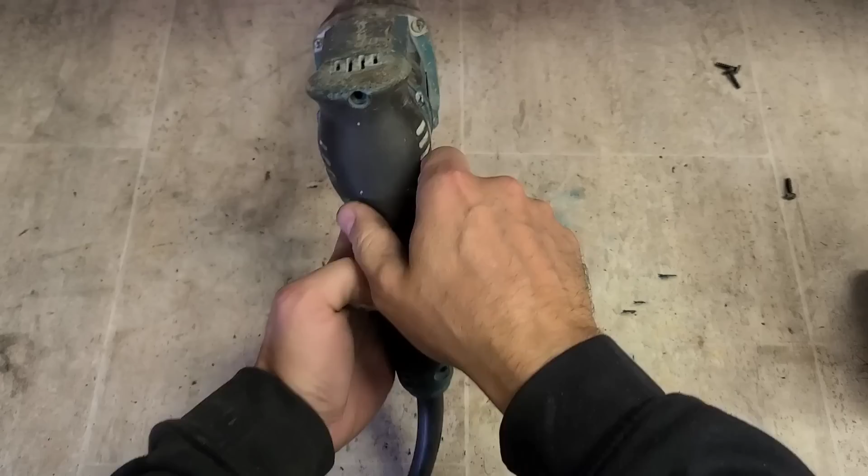Need to quickly get into this and get her fixed. He's not standing waiting on it, but he needs it today. He's gone away now to actually fit some of the gates and railings onto the holes he's already bored, so I have a wee bit of time to get her fixed before he has to bore the other holes.

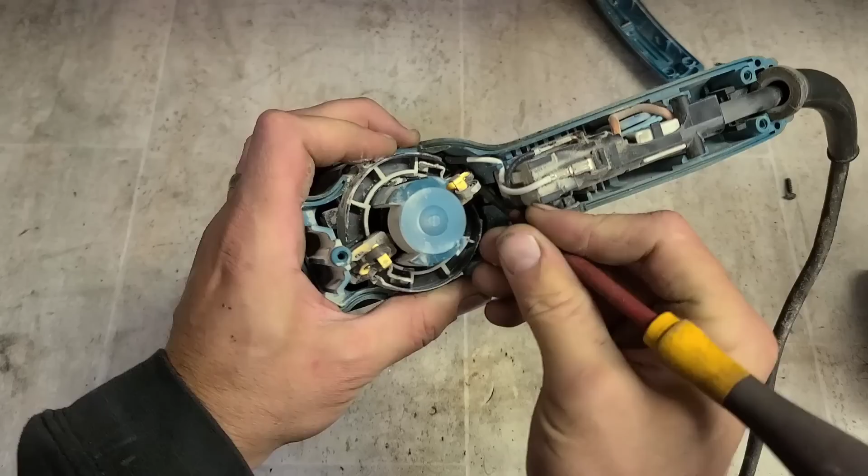Now we don't need to go on to the gearbox section, that should be fine. Doesn't say anything about the hammer performance. This thing just got too hot and popped.

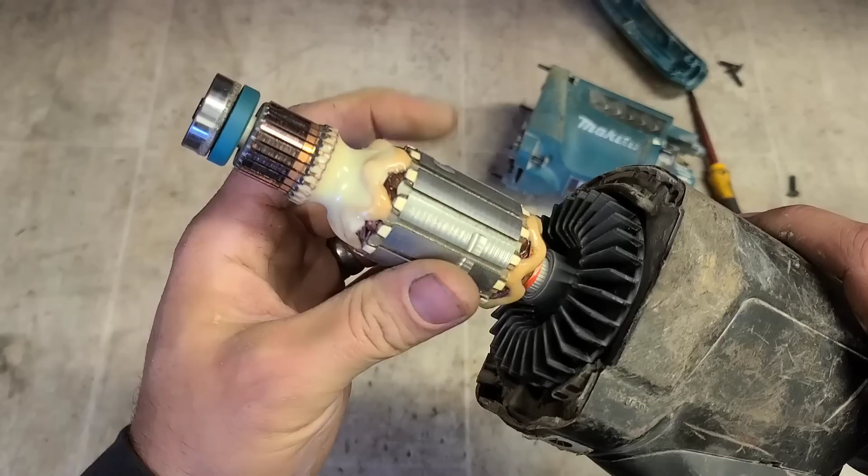It's even hot just from me running it for a few seconds. It's just one of them motors you can't actually tell by looking at it that it's burnt out. Looks good, but it's shorted out somewhere inside.

So one of them windings is actually touching the other, and there's two segments of the armature being energized at the same time. So whenever the right one is energizing, another one is forcing back on it, causing it to try and run both ways at the same time basically. That's why you hear it struggling. New armature needed.

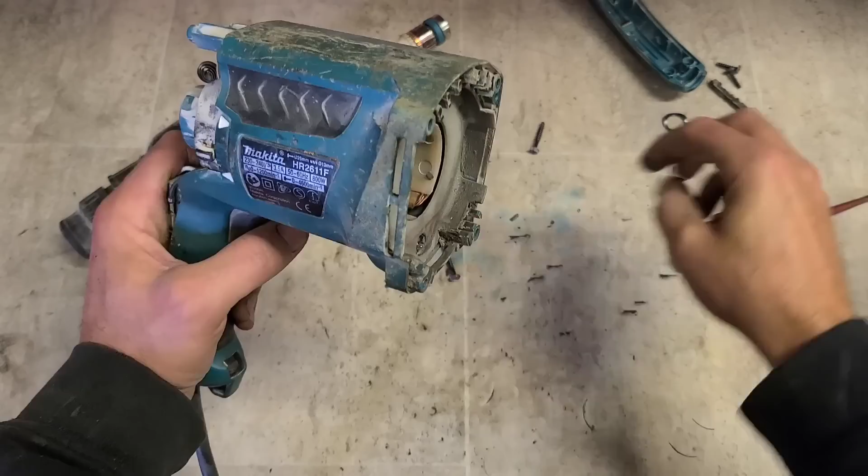Block vents ain't going to help it either. Just give that a quick wipe down as well, because we can't spend too much time on this.

Switch out of the way so we can get to this screw. It's just so we can take the brush holder out. This will need a new set of brushes as well if we're putting on a new armature.

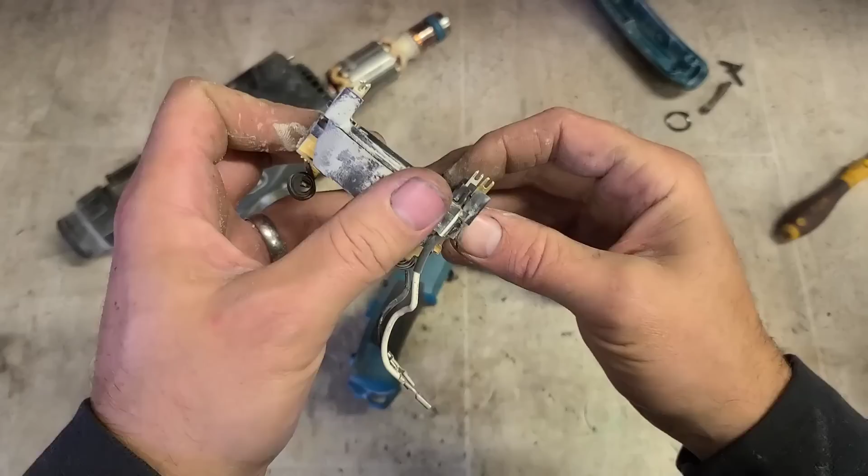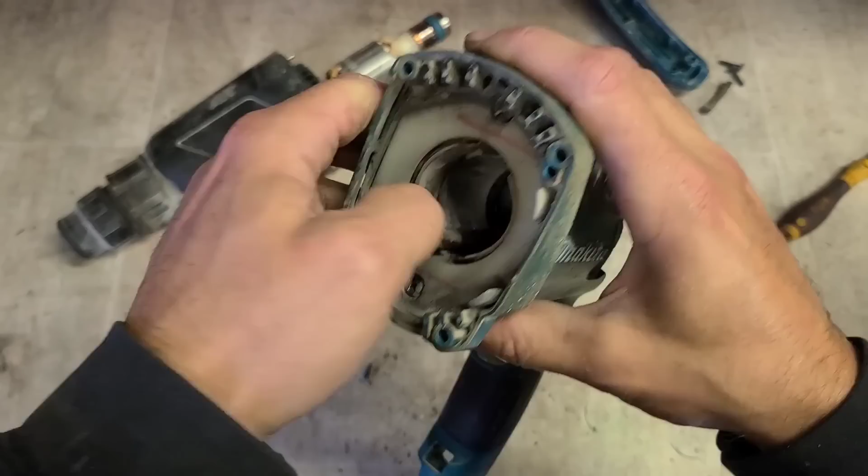Now the contacts aren't burnt either, so that should be okay for the field. And the field itself hasn't melted either. Sometimes when they get too hot, the coils of the field can get too hot and melt the plastic up here, which then shrinks in and jams up the armature, but that came out free enough, so that should be alright. The coils themselves aren't actually blackened or anything, so that should be okay.

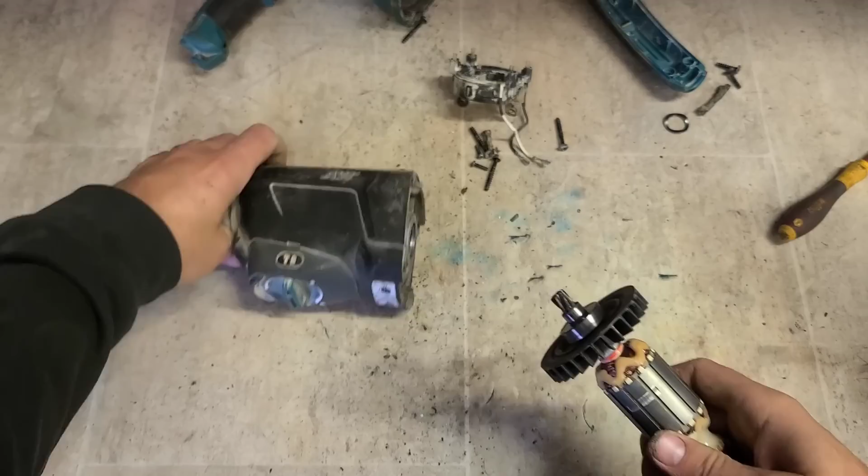Just to be sure, stick it on here just in case. Gone.

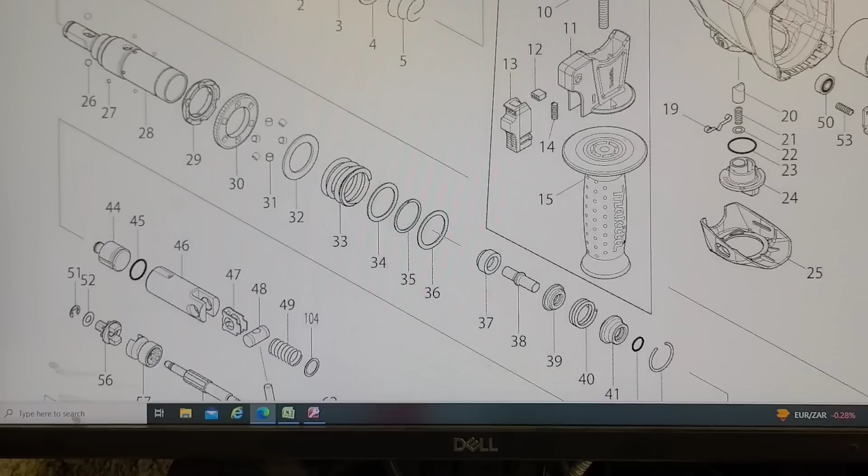Right. Going to need a new one of these and a set of brushes. Straight away, I'm into problems. I haven't got an armature for this thing, not in stock. And this one's a 240 volt. This number here.

My stock is showing me nothing. Never even brought one on before. So I'm not getting a new armature for this today, so I can't fix it with a new one.

Maybe I might have a second hand one. I know there was one here with a smashed gearbox, unless that has the right armature for it as well. If it's a matching one, maybe this will work.

This here one's actually a different model of Makita drill, but same voltage for a start. A lot of Makita stuff, any brand, they don't always go with new parts. Sometimes they can use the same motor and modify the gearbox, which gives it a new number, but sometimes the parts are interchangeable. So we'll check the numbers of this and see if it's compatible with the one we have.

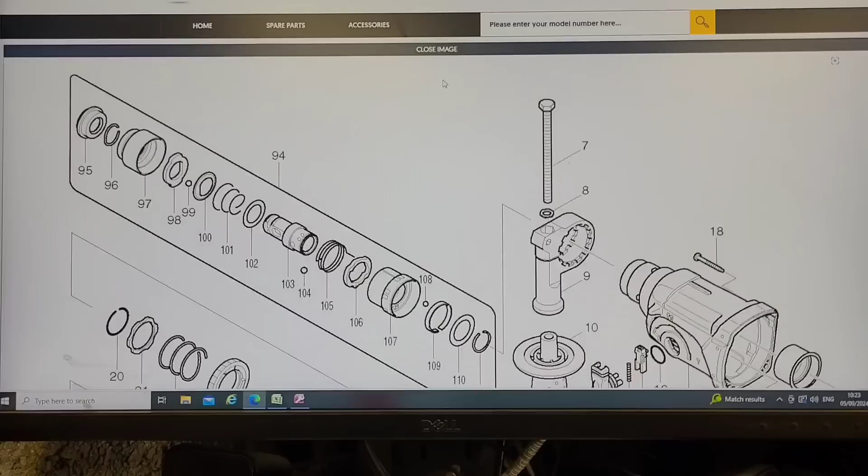Right, so this one is the HR2611T, and our one is actually the HR2611F. So we'll check the number on this, 63, and see if it's compatible. So that's 515289-2. This one's 515359-7. So no, it's not - that one's not the same motor.

Question is, is this the one I'm thinking of? Check the serial number to see why this one was scrapped off. If I search my repair sheets for this particular drill from the past, searching the serial number, it was looked at in January 2022, and it wasn't worth fixing because it has a burnt out motor. The armature in this one's already gone, so that's not the one I'm thinking of.

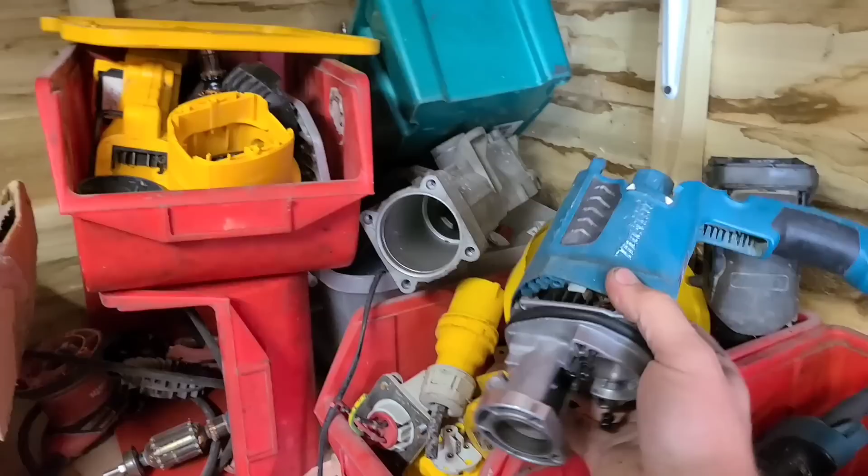Maybe this one - it's 240 volt anyway. Now the body's looking more promising. The actual clamshell's the same, just different numbers, but I'm not 100% sure if this is actually out of that machine now. This is kind of just sitting loose inside of this body.

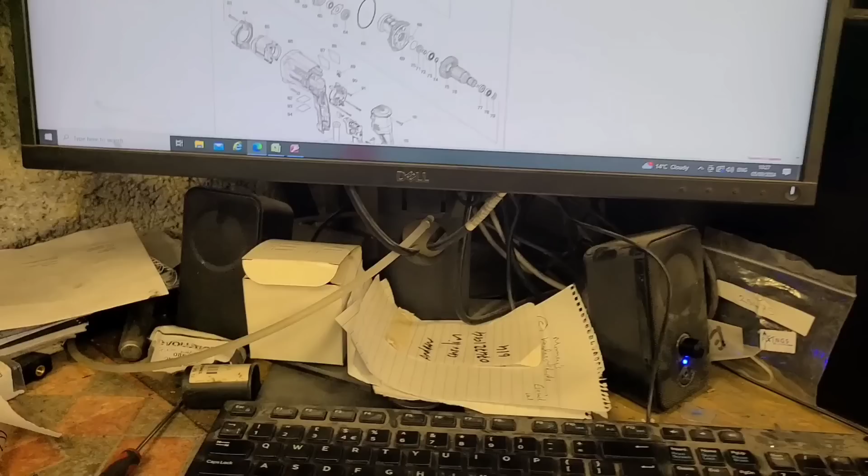Check this first, see if it's compatible. So this one is the HR2610, again 240 volt, part number 76. So 240 volt of that is 5153597. The one we want is 515359-7. So that's it.

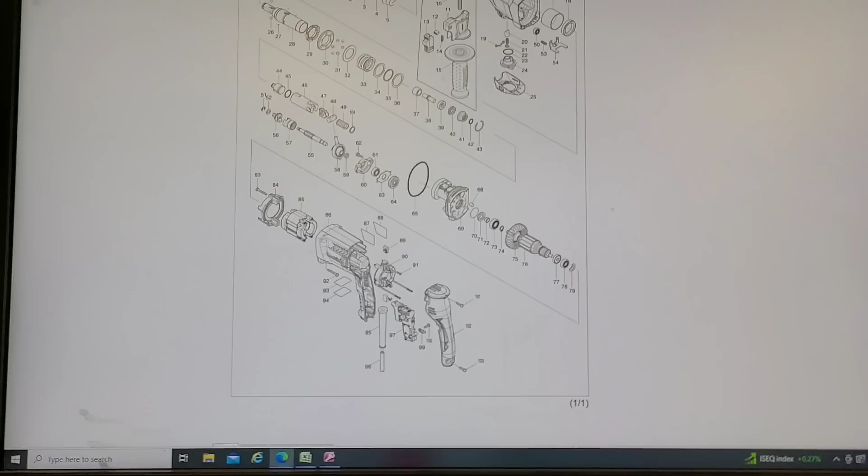This armature from the HR2610 is the same as the HR2611F. I just have to hope now that this is that armature from that drill.

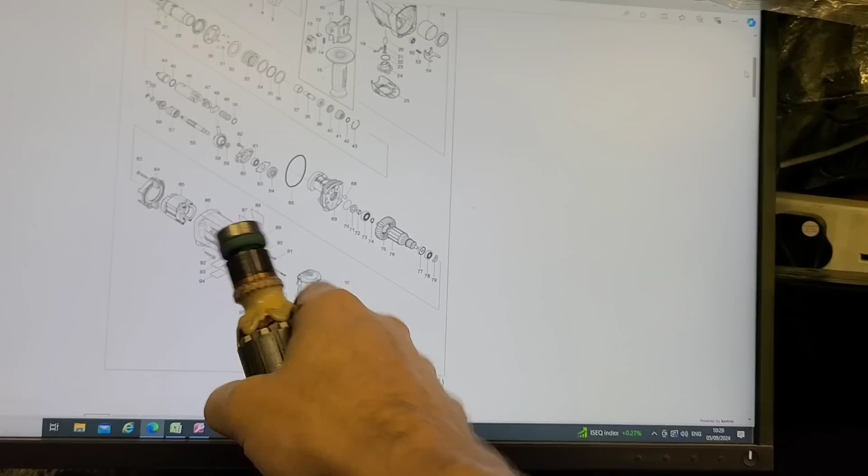Going with the diagram, this does look similar. Now you can't tell the parts just from looking at them - they don't actually have any part numbers written on them, nor does this housing. Sometimes they do, but this one doesn't. So I can't even tell from part numbers if this is definitely the right one, but I should be able to match it to the one we just pulled out anyway.

That looks pretty good. This one looks like it's a wee bit thicker - that's only because there's more lacquer on it, or this here resin. I think we're good to go with that.

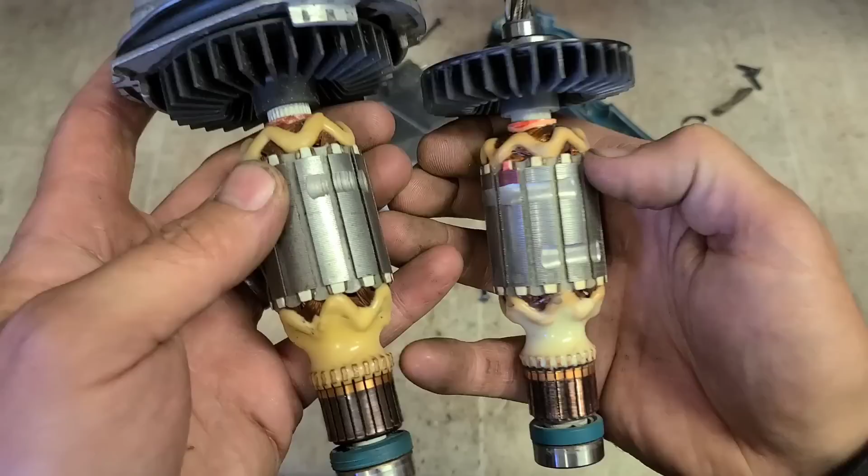One thing you definitely want to make sure is the windings - make sure it definitely is a 240 volt machine. You can tell by the actual thickness of the windings inside. See the way these ones here are a lot smaller and more of them. Same as this one - smaller gauge wire and lots of them. If it was 110 volt, they'd have a thicker wire and less windings.

Like that there, for example. So you can quickly tell if you're using second-hand parts, if you've at least got the right voltage, because you could have the right machine from the right model, but you're not sure the voltage. So a 110 volt will have thicker windings and less of them. The 240 will have a thinner gauge wire.

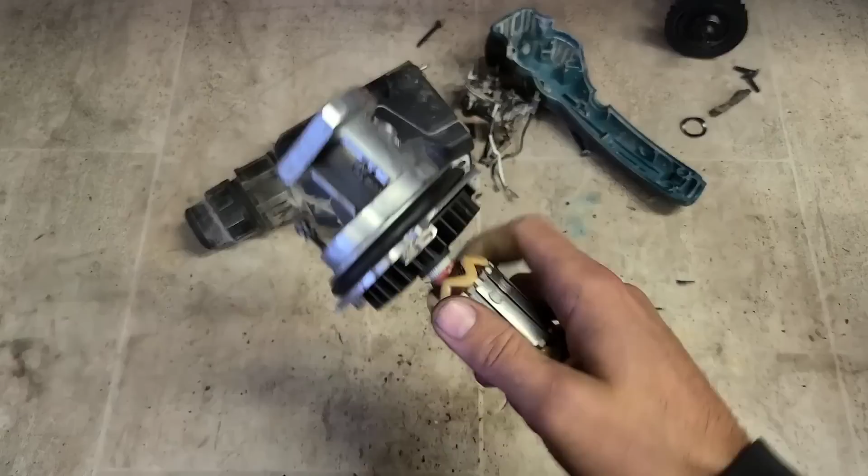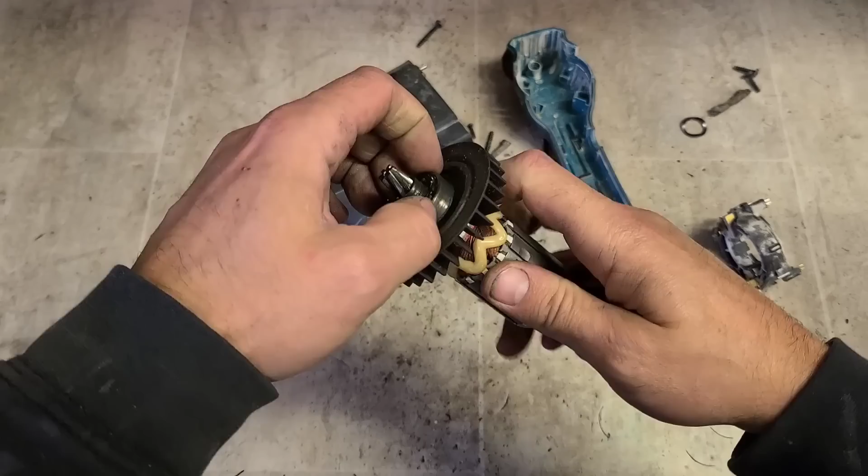So this should work. Might need a bit of a clean just - clean that, we'll clean this down a little bit. And the bearings are okay as well.

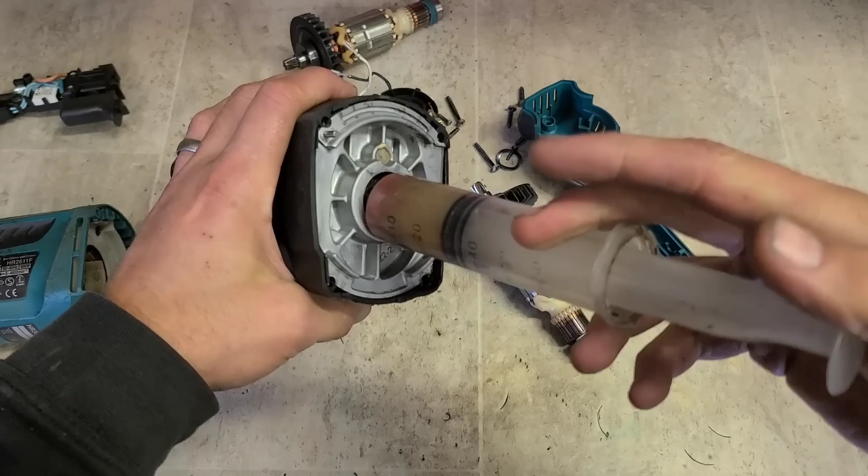Right, that's the insides of her all cleaned up. I think that's us just about ready to go with this Instafix. So stick a little bit of fresh grease on there just in case it's light - not much because we don't know how much is on there, just a top up.

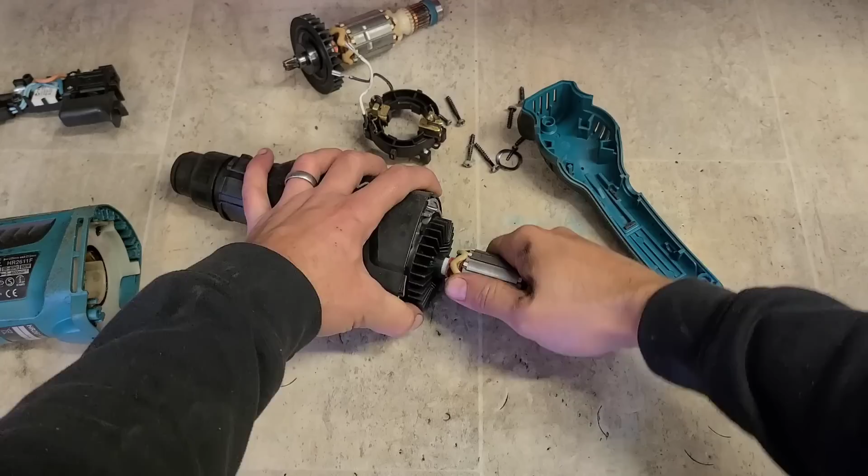Now, not everybody actually gets an Instafix on here. Just doing this one because he's actually a regular customer - this man's in and out of the shop all the time. Plus, he's just a really nice fella.

Don't want to be seeing him stuck without a drill. And more so than that, he didn't even ask for an Instafix - he wasn't looking to get this fixed right there and then on the spot. We just offered to do it, so he's not stuck like. Plus, if this was going to take too long to do, he was actually just going to buy a new machine to get him going today. But you don't want to see your customer spend extra money if he doesn't have to. So we say we just get this on straight away and see if we can get it fixed for him.

Like I say, he doesn't need it for the next few hours maybe, so after lunchtime, if it's ready, he'll be on to get it. And if it's not ready, he can get a new machine then.

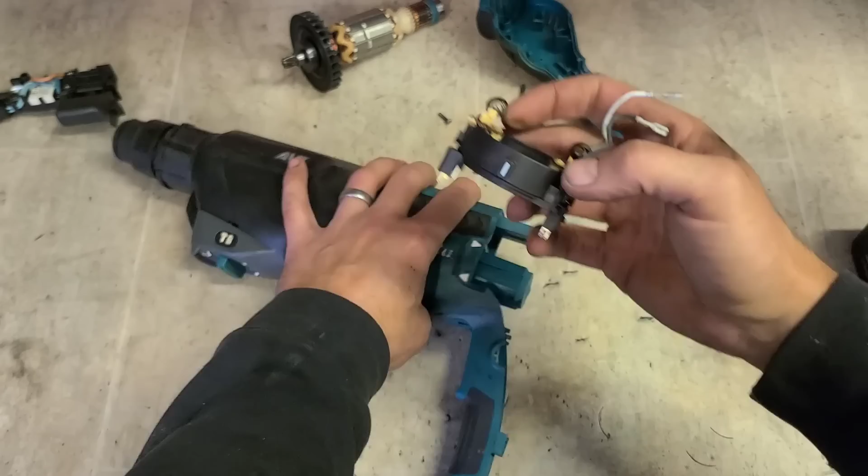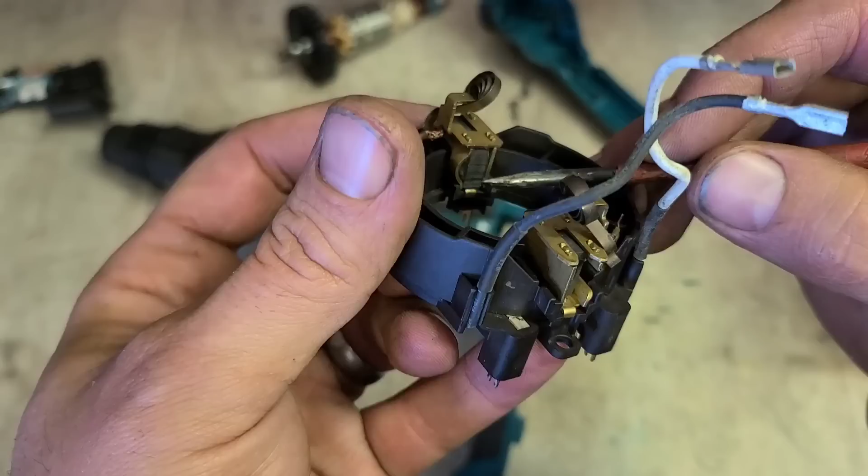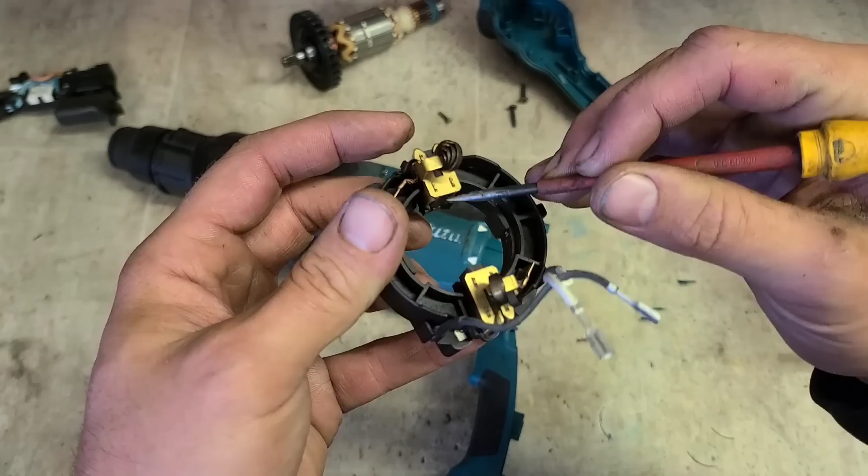Now, brushes - if you're changing the armature, always put in a new set of brushes as well, because you don't want to risk the new armature on an old set of brushes. See these ones here, they're a wee bit worn. A new armature, that could potentially do a brand new armature damage, but this isn't brand new, this is an old worn one, so you don't have to be as careful. Plus these brushes aren't even halfway worn yet, so there's still plenty of life left. Reusing these will help keep the cost down again.

You need to have the switch out of this thing to actually get the wee screws down in here.

Usually screws actually hold on the brush holder. Some of them are actually screwed on the other side - the screws holding the field go the whole way back to the brush holder. This one's just screwed on here, these two wee screws, and they're hard to see sometimes. So if you're ever wondering how to get this brush ring out, move to one side and see if there's any screws up in here in the middle. Because some of them also have a clip, they're not screwed on at all - they just clip on, so you unclip it to lift it off.

Move your spring back over. And we are nearly there.

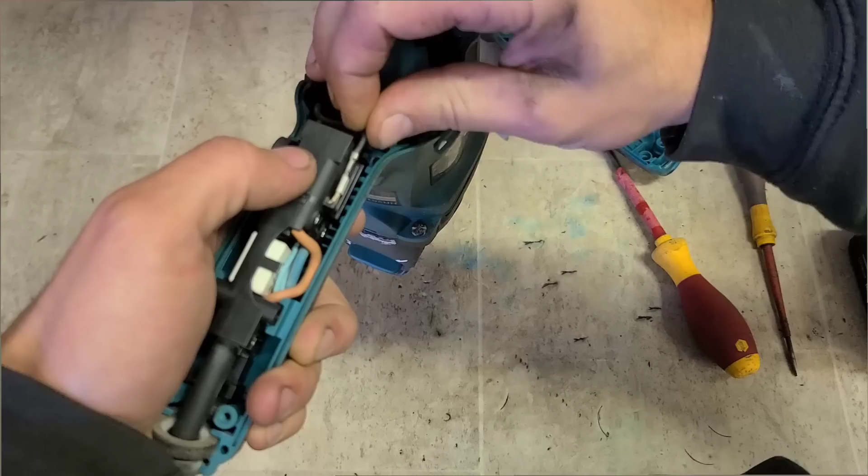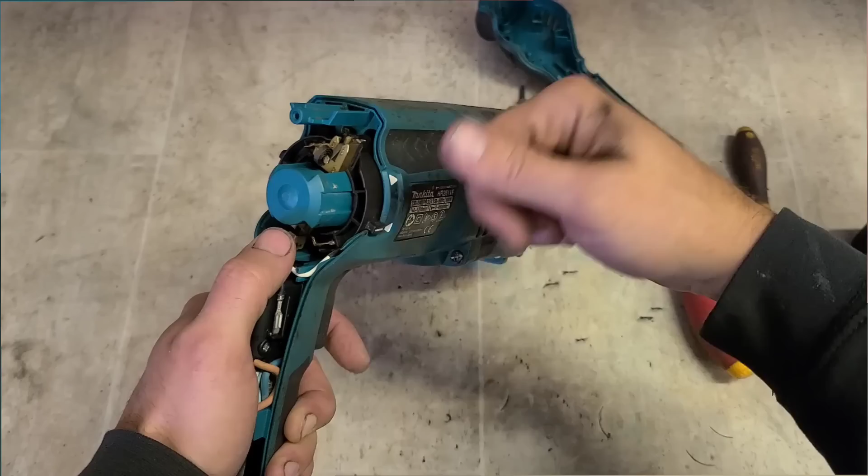And the wires and cells, polarity, which way they go - white's on top, but it doesn't matter if you mix them up. Not going to do any damage. Only thing it's going to do is reverse the switch, or reverse the brush holder. So whenever you go forward, drilling right hand, it's going to be going backwards or left. Whenever you go to the left to drill out, it's going to be drilling forward. That's all it's going to do - not going to do any damage. It's just really annoying if you're used to it the other way.

But that should now, hopefully, get this thing sorted, as long as there was nothing wrong with that armature to begin with.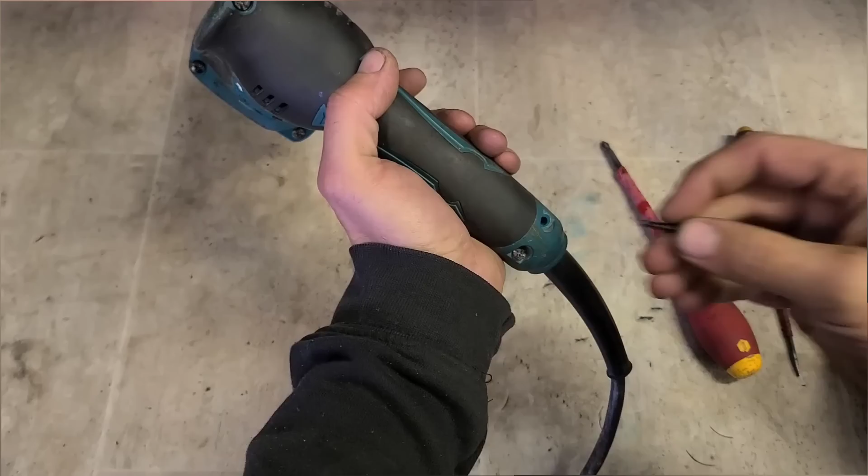Now the old drill that this came out of, I can't actually remember it because it was a warranty job. It was inside of the year, and it smashed the actual shaft and side - big long steel bar with gears in the end of it - cracked it and actually stripped out the gears. The reason we still have this is because it was taking 2 months for that particular part to come in.

So this original one we took the part out of was also from a regular customer. We didn't want to leave him waiting 2 months, so we actually just gave him a brand new machine instead. We took the loss in that and kept the old one for spare parts. So the motor of it should hopefully be still good.